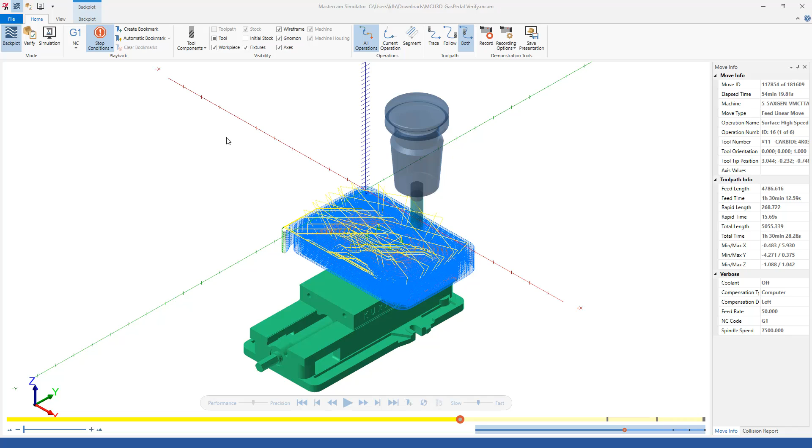We're going to continue on with our previous example file inside the Mastercam simulator and look at verify. We left off in backplot, and I'm going to switch right over to verify inside the Mastercam simulator.

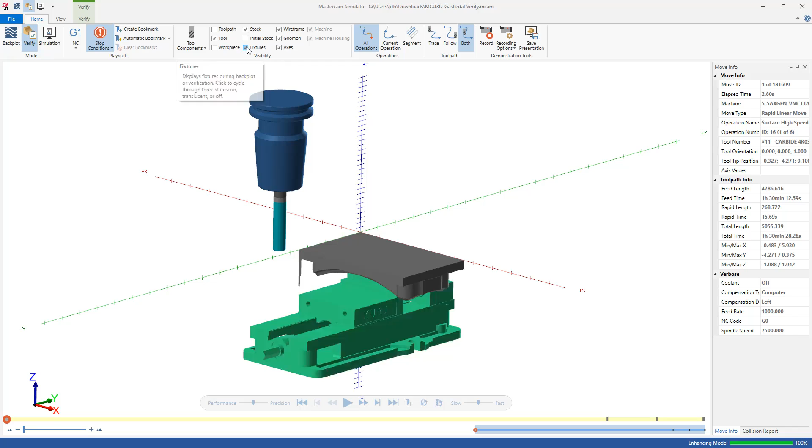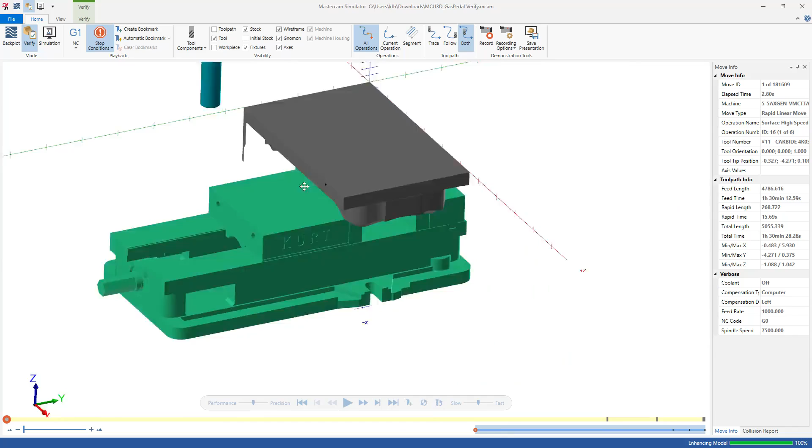Let's clean up some things before we begin. I'm going to make my tool solid. I have the workpiece shown, but it won't help much since it's hidden behind the stock model. The fixture is shown as this green shape, which covers two entities: our current vise, which was on level 205, and another piece used to hold this part in place. We can also select our stock, which is our stock model representing the stock, and right now it's transparent. We'll click it once and then again to turn it back on.

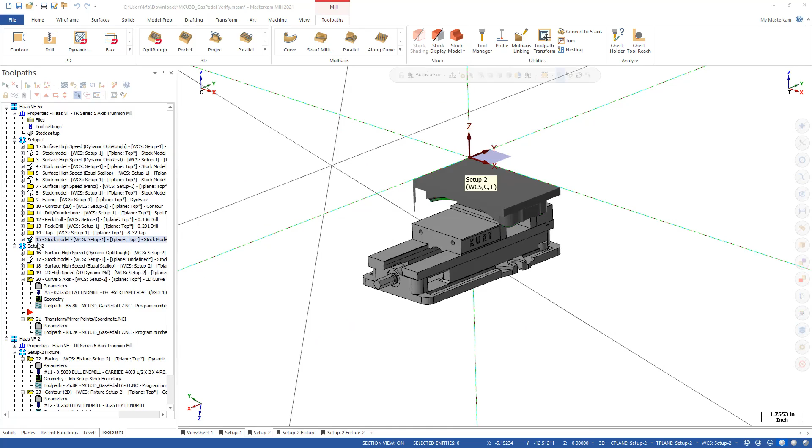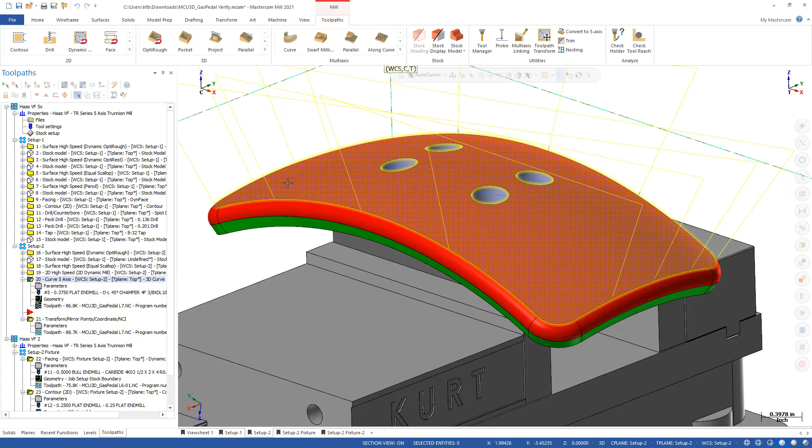Just to recap, if I minimize this for a minute, we are simulating everything in setup 2 here. So we're simulating this OptiRest toolpath, then the equal scallop toolpath, the dynamic mill in the holes, and then the two curve 5-axis toolpaths. Interesting to note, in this curve 5-axis toolpath, there are no features representing the grooves, because those toolpaths were created previously using wireframe geometry. So technically we'll be gouging our part since it doesn't have the groove in it yet, but we're putting the grooves in afterwards.

So back to the simulator, let's do this. Let's make sure the stop condition is set to operation change. We will crank up our precision a little bit. In some cases throughout this video, I may speed up the playback so we can watch the entire thing in simulation, but instead of taking 5 or 10 minutes to watch it, it'll be sped up so we don't have to wait as long. Let's hit play here.

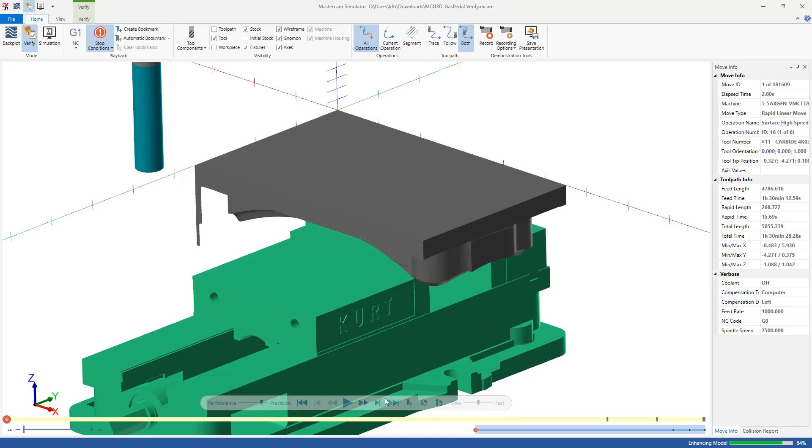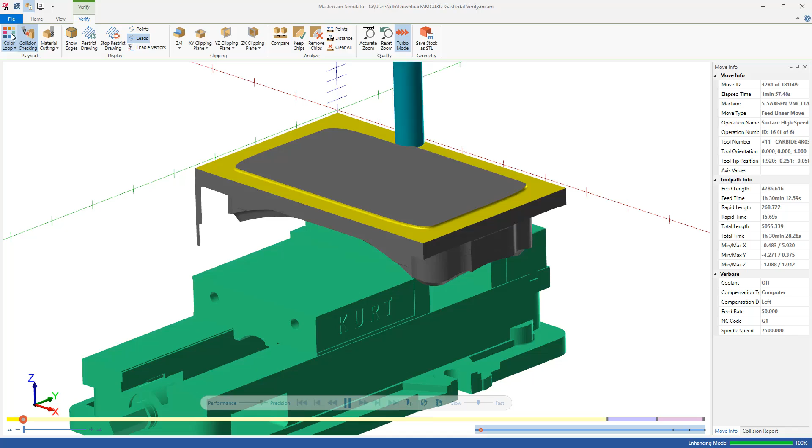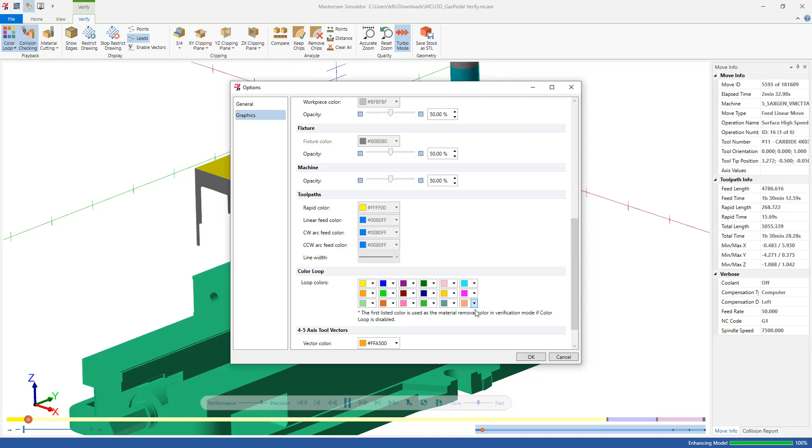As you can see, it's working its way from the outside in because that's part of that toolpath. The yellow here is because of our color loop option. So while it's running, if we go to verify and click on color loop, then go into the file options, you'll see that under graphics we can choose the various color loops. The first toolpath will be yellow, the second one blue, and so forth. That's why these colors show up on the model here, because of these settings.

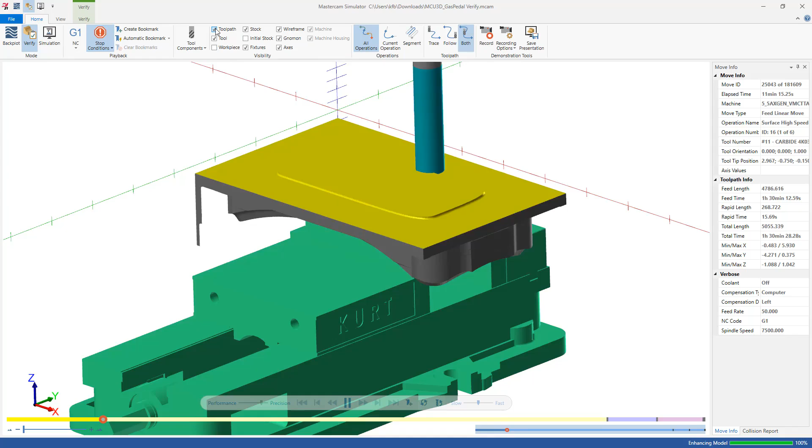Let's hit cancel. While this is verifying, let's experiment with showing the toolpath inside of verify. Let's go to the home tab and click on toolpath. But what do we want to see? We don't want to see the whole thing here. We want to see the current operation, and we're going to choose trace.

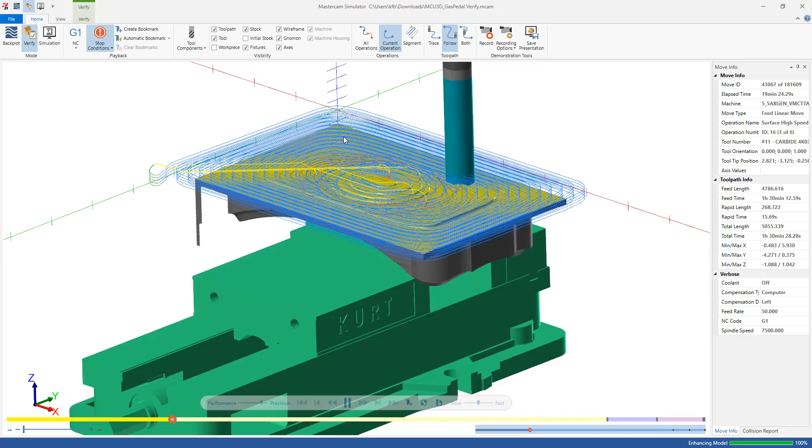As you can see, the toolpath is being removed as the tool goes over it. If we chose follow instead, we'd get rid of everything below, and as the tool moves through the part, it leaves the toolpath behind it. I'm going to choose segment.

And we can do both. As you can see here, if we slow this down a little so we can understand it better, it has 10 motions or segments ahead, and 100 behind. So this tail dragging behind it is 100 toolpath moves, and in front of it it's 10. The reason we have that is because we're set to both here.

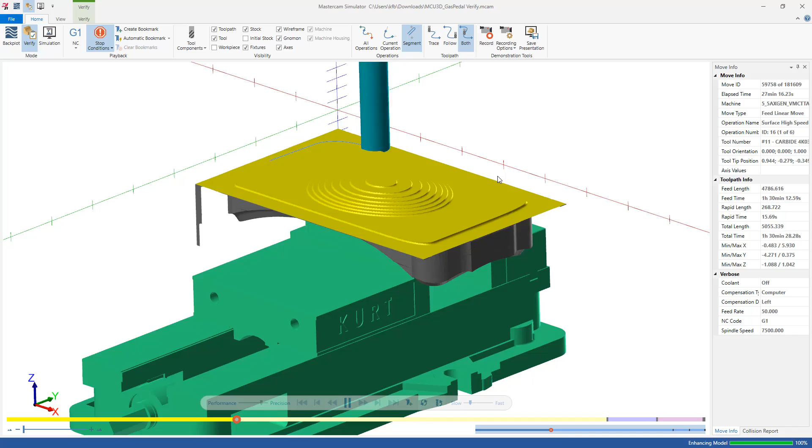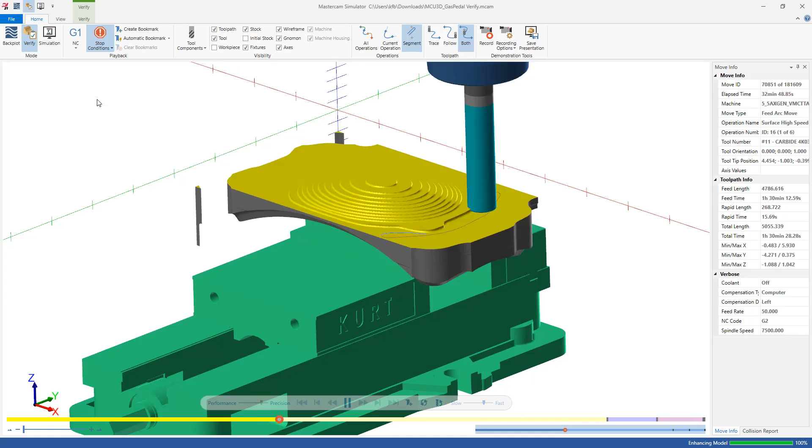I'm going to speed this up a little, and we're going to let this record, then edit through it to make it faster, but that way we can see exactly how this part looks after the roughing is done. As expected, it should stop after it roughs this first toolpath.

Now, since we got to the end of that operation, you'll see the simulation has been paused due to the following stop condition: the operation changed. So before I hit play again, I'm going to save a bookmark, by going down here and clicking Create Bookmark. That'll put a bookmark right here in our timeline.

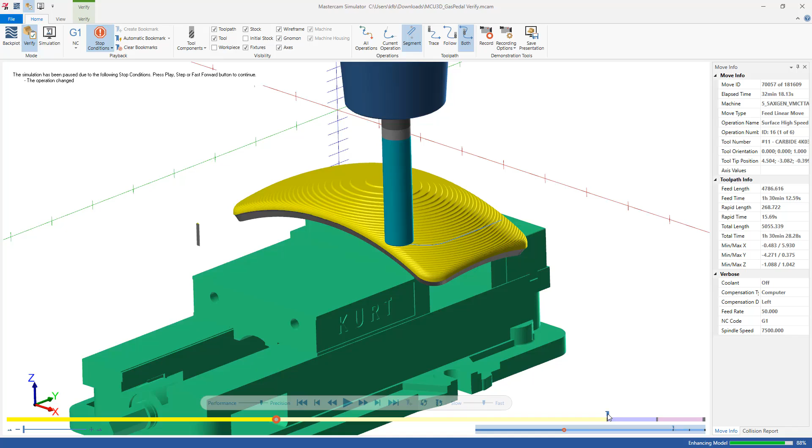So at any time, if I wanted to fast forward or rewind, when I go back to this bookmark, the part will be in this verified state. In other words, if I go back here, we don't see the part in its verified state because I would have had to save a bookmark here. Then you could see it partially machined. But if I go here, now we'll see this verified state with this toolpath.

So let's hit play again. And as you can see, that was a finishing toolpath, and we did edit the video to make it a little faster so we didn't have to wait that whole time.

Now the next one should be the dynamic milling. Let's reduce the speed a little bit, and let's also save a bookmark here. By the way, we could create automatic bookmarks at every operation change or tool change and so forth, but at this point we're just going to manually do it.

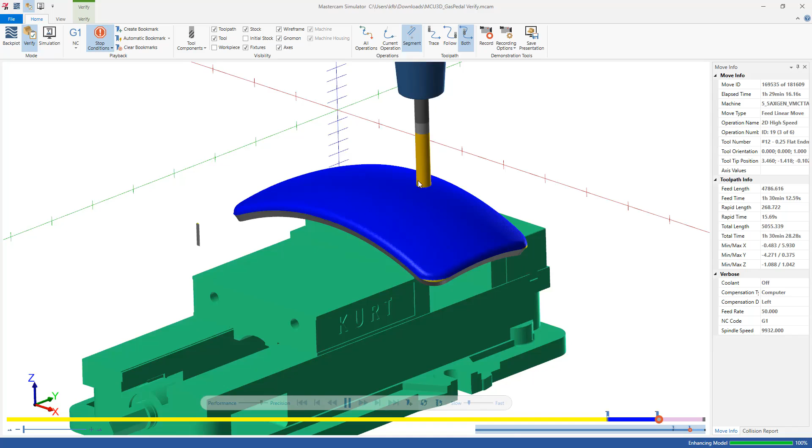Let's hit play here. So these are the holes it's creating. As you can see, it's working its way in there. This is the purple color because the first one was yellow, the second was blue, and this third one is purple, because of the color loop option.

And if we want to, we can speed this up a little bit. You briefly saw that toolpath motion there because we're doing the segment display.

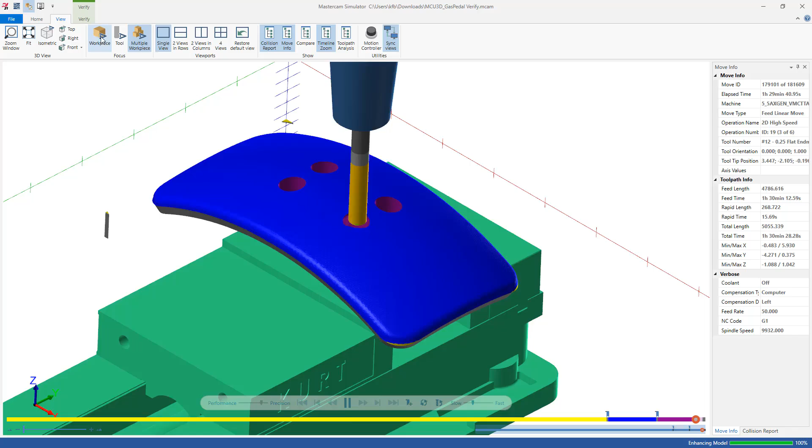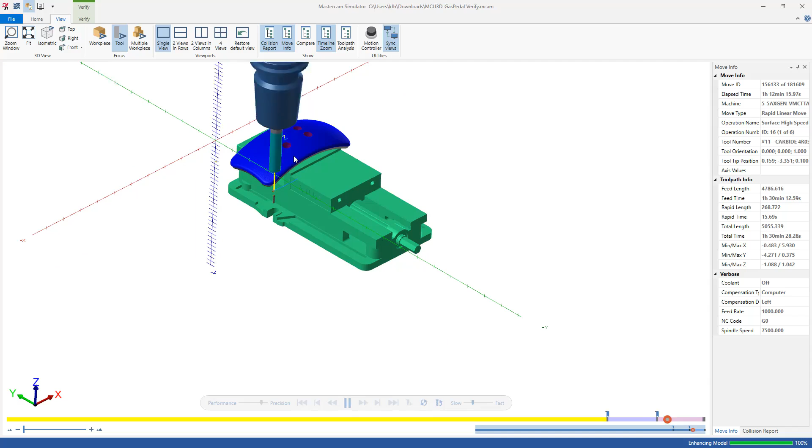While this is doing this, we can also look at some other options. For example, under the View tab, you could change workpiece, and that'll focus the Mastercam simulator on the workpiece. You can also do the tool. If we rewind this a little bit, the tool is being focused and the workpiece is moving. We're going to go back to multiple workpiece.

Let's get to our right spot here. So let's go to this bookmark. This is where we start the machining of the holes. So let's move ahead a little bit, and we'll hit play and speed it up to get to the end there.

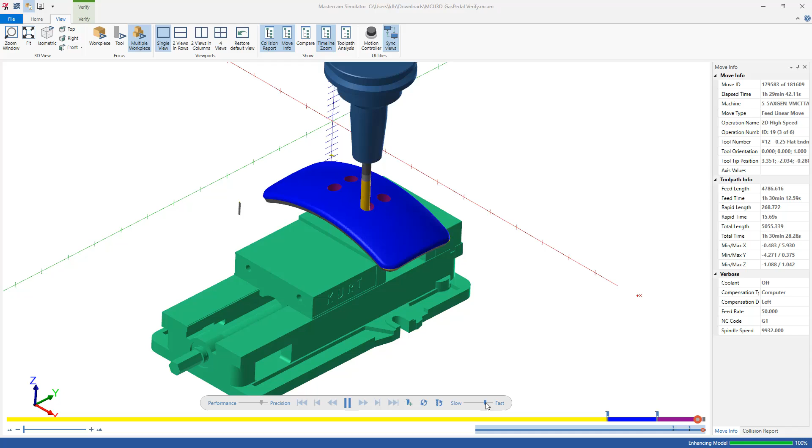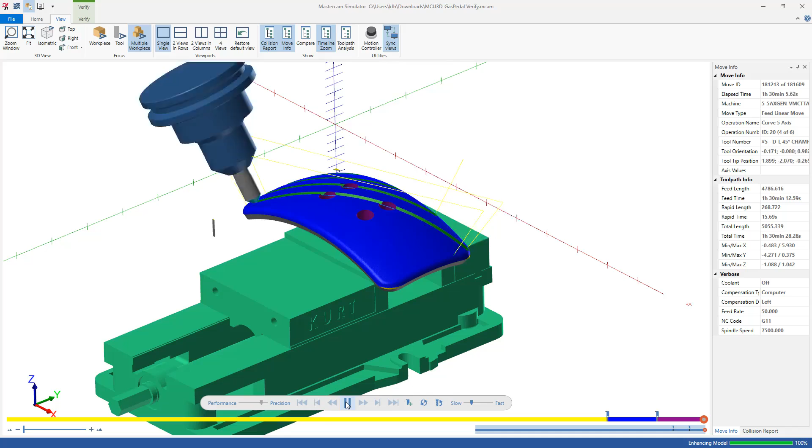Based on our stop condition here, we should stop. So now we're going to be looking at the 5-axis toolpath. Again, this 5-axis toolpath we did not create, it was part of the file, but we can at least utilize it to simulate. So let's hit play, and you can see how it works through that.

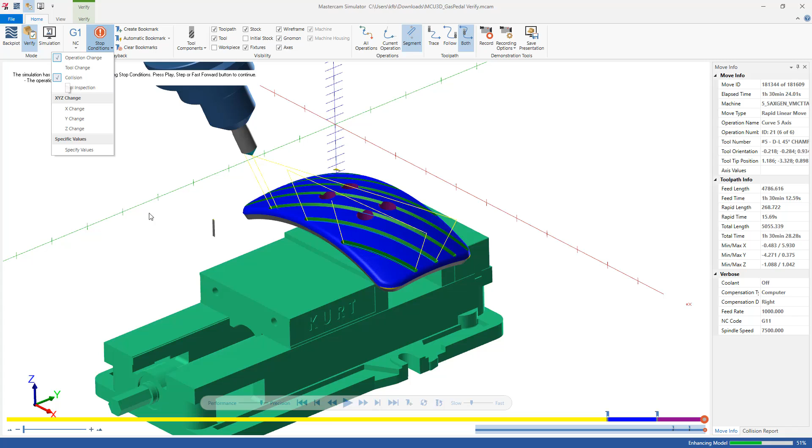Now, just to experiment, we can also tell it to stop on a collision. We're not too familiar with this toolpath right here, but as you recall, this 5-axis toolpath is cutting the part because we don't have those grooves designed into the model. So it'll be interesting to see if the collision actually gets caught. As you can see, it does not, based on the tolerances or our settings inside of collisions.

For example, under collision report, there do not appear to be any collisions. Now we can adjust that a little bit if needed, where we could tell it to look for the stock and determine more accurately if there was a collision. So let's do that now.

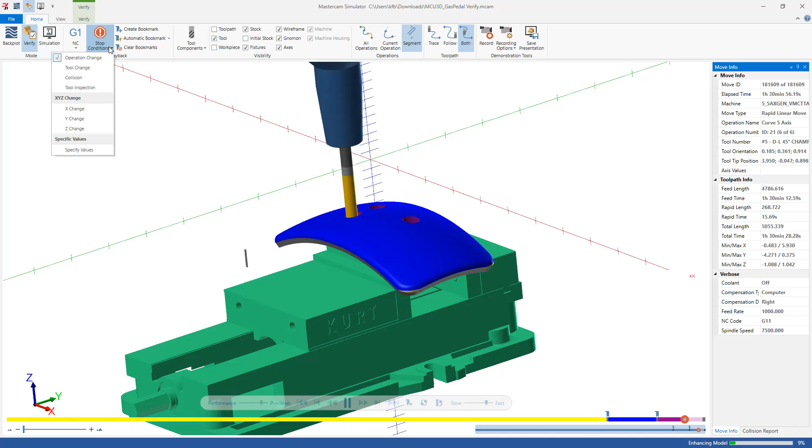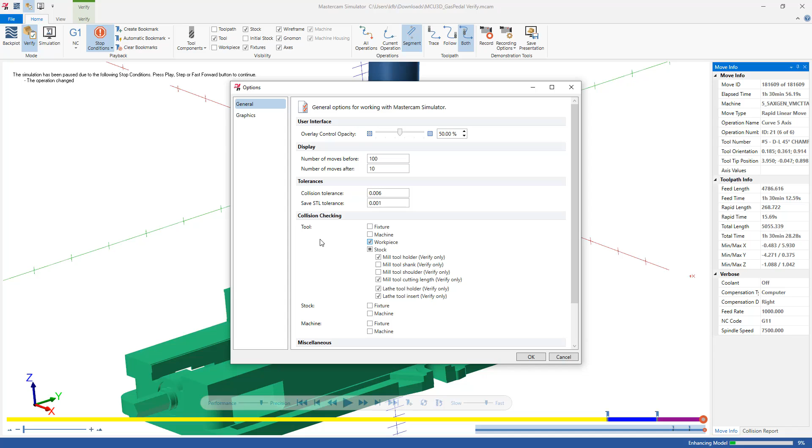If we go back to this bookmark, before we had any of the holes machined, we'll go through and simulate these holes being machined again. Under the stop condition, I'll make sure collision is turned on. However, one of the things we need to do inside the File Options menu is actually tell it what to look for in collision checking. So I'm going to tell it to identify a collision between the tool and the workpiece. And if you recall, the workpiece does not have those grooves in it, so when that 5-axis toolpath goes into the workpiece, it should trigger a collision. We'll make sure that collision is turned on.

If I do this and hit the letter S key to step through it step by step, it's not going to let me continue because a simulation has been paused due to the following stop condition: a collision occurred. So the interesting thing is if I hit play, every collision is going to be detected here and it's going to stop. So let's turn that off.

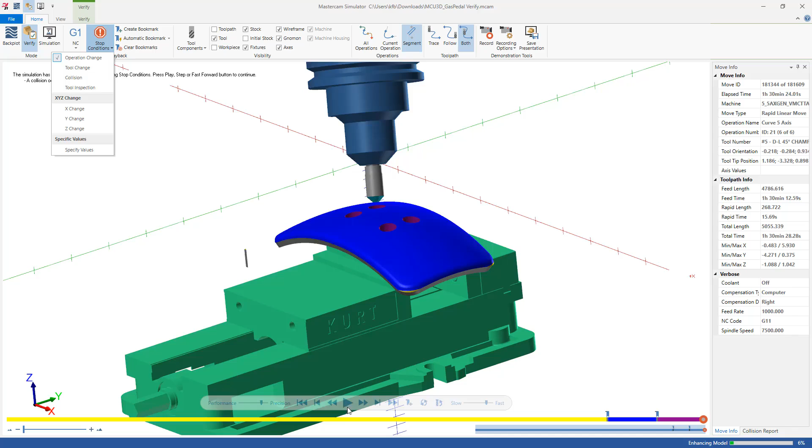Turn off the collision and then just hit play. As you can see, it detected a collision, but in this case we needed to tell the options inside Mastercam Simulator what those collisions actually are. Let's finish this through to get to the other side. And now we have our finished part.

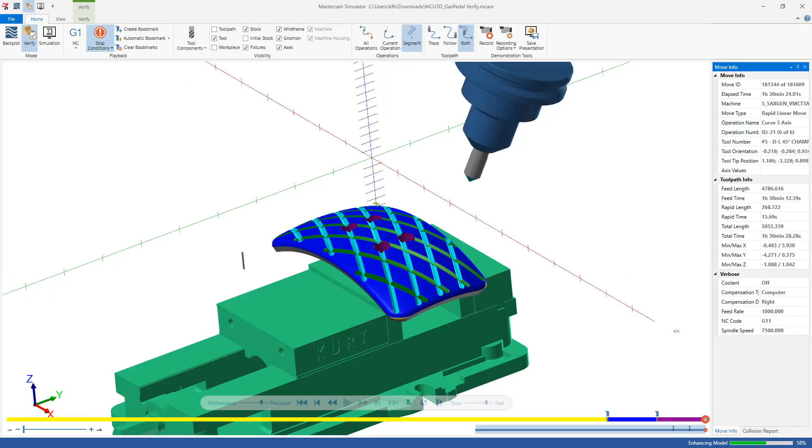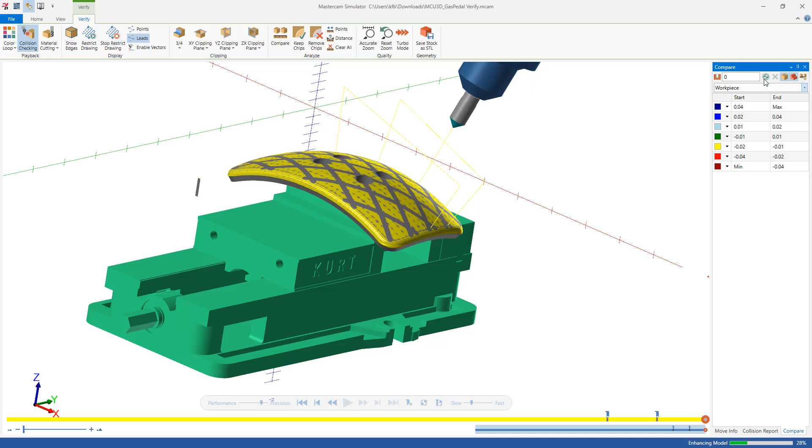So we can see in this case the verified toolpath results. And like we saw earlier, if we went through and turned off the color loop, we'd see that single color representing the entire part. Now regarding that collision, if we went to compare and turned on compare, it's going to start asking for geometry. So what are we comparing against? As you can see here, we have our stock and we have our model. You can also choose, for example, what the workpiece is, and you can browse for the workpiece. Let's keep it as is. And for stock to leave, we'll keep a 0 and hit refresh.

In this case, let's go into the view, to the home tab, and turn off workpiece. As you can see, Mastercam does see this as collisions, and we expected this because, if you remember, these grooves are not in the model. So as you can see, the red and the dark red were going down into the part by a few thousandths, which is simulating that compare.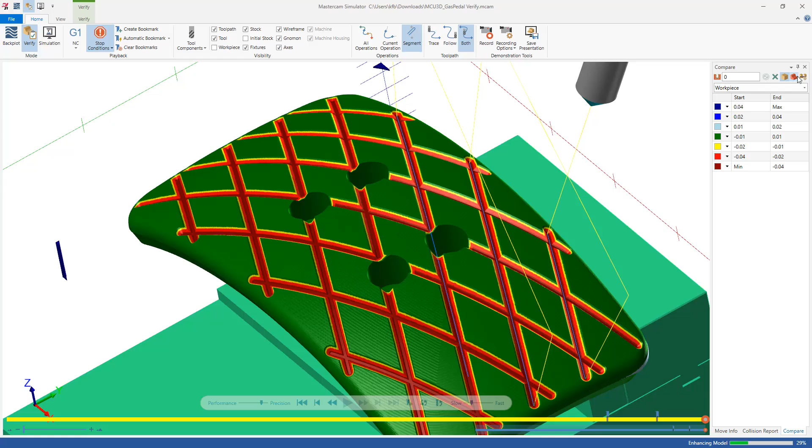So this is as expected, but here's where we can compare the designed model to the machined model. Of course, right here, we're looking at the stock. And if you want to look at the model as well, you can see that. Of course, the model hides the compare issue, so that's why we turn that off. We also have some options here to work with the tolerance. I'm just going to cancel out of that. And when we're done, we can go back and to verify and turn off compare. As you can see, we're back to where we were.

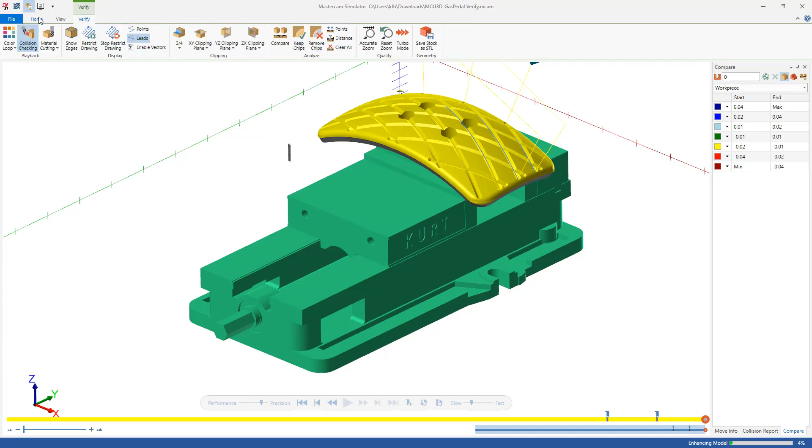So in the next lesson, we'll take this one step further and we'll look at the simulator option, specifically on the Home tab, the simulation inside of Mastercam Simulator.